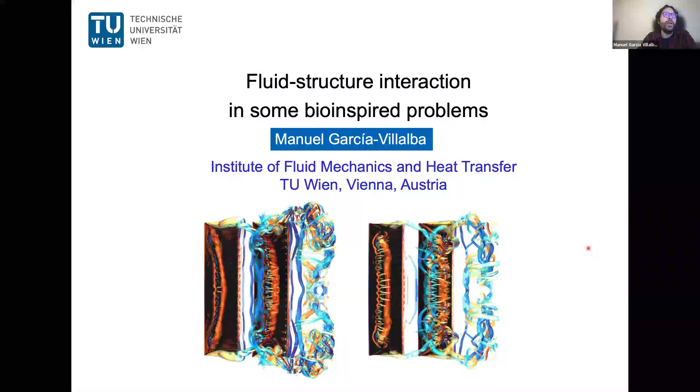The work was supervised by me and also by Oscar Flores, who is a professor of aerospace engineering there. We were lucky to have a group of very talented people who are now conquering the world everywhere. Our main in-house code was developed by Manuel Moriche, who is now a postdoc in my group, and by Alejandro Gonzalo, who is now a postdoc at the University of Washington in Seattle. The work I'm going to present today was mainly done by Gonzalo Arranz, who is now a postdoctoral researcher at MIT, and by Cayetano Martinez Muriel, who very recently joined the team of Airbus in Germany. As I said, this was a very good team, and they did very nice work. If you like it, the responsibility is of Cayetano and of Gonzalo.

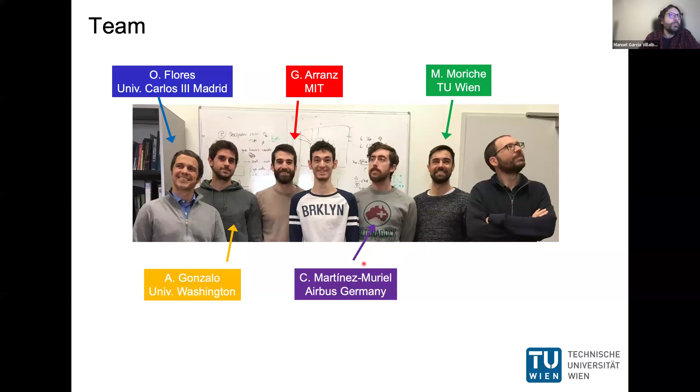This is the outline of my talk. I will first discuss a little bit about the motivation of our work, followed by some slides in which I will discuss the numerical methods that we employ in our in-house code. In particular, I will discuss the immersed boundary methodology that we use and the multi-body approach.

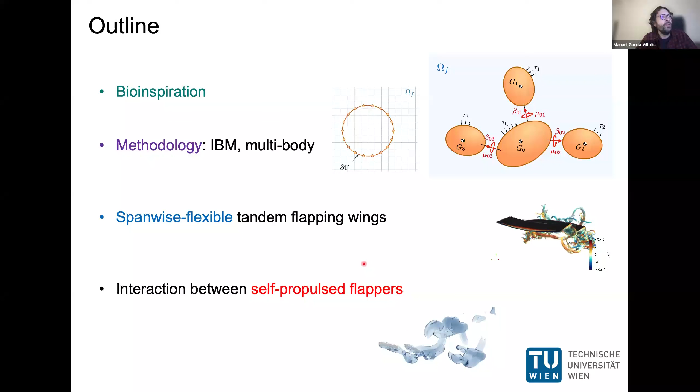This will be followed by the two topics that I have selected for today. As you can see in the images, I will discuss flapping wings in tandem configuration, where the main ingredient we want to study is the fact that the wings are flexible along the span. This will be followed by the hydrodynamic interaction between self-propelled flappers.

The motivation of our work is bio-inspiration. It goes without saying that insects, fish, or birds fly and swim professionally. They are very efficient and perform very impressive maneuvers. But even simpler systems in nature are also worth studying. For example, we have studied in the past Samara seeds that disperse using auto-rotation mechanisms. One can also look at the hovering of hummingbirds or at the complex patterns of swimming that fish perform when swimming in schools.

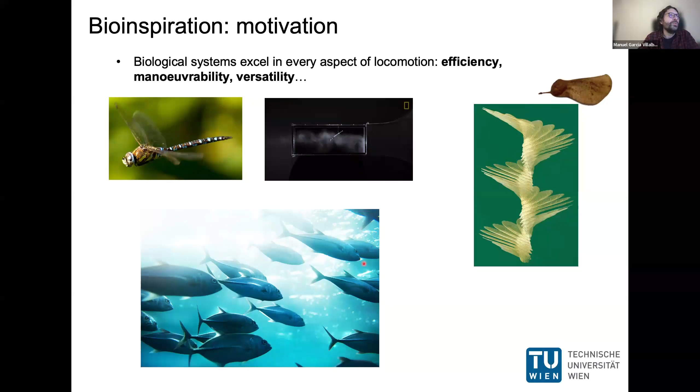This is why engineers are trying to mimic their capabilities, and there are many recent devices being developed all over the world, taking inspiration from nature. I have taken here some of these recent devices, for example the Delfly from TU Delft, or the Hummingbird from a company called AeroVironment, or the RoboBee at Harvard. I could have taken many others. There are many such devices under development, but in my opinion, at the moment they are following the path that engineering took in history in many cases, where they try to fly first and the theory comes later. So there are still many processes which are not very well understood, and this is why these devices are still rather clumsy, and they tend to work well only at their design point. But as soon as you go off-design, the performance is very limited.

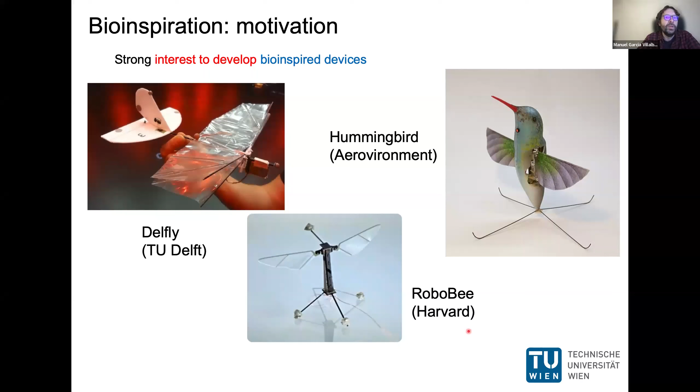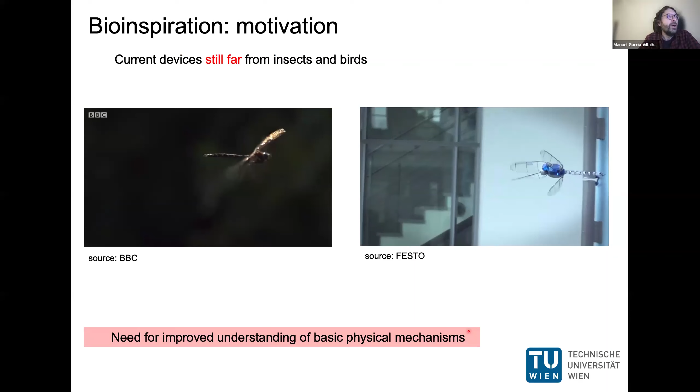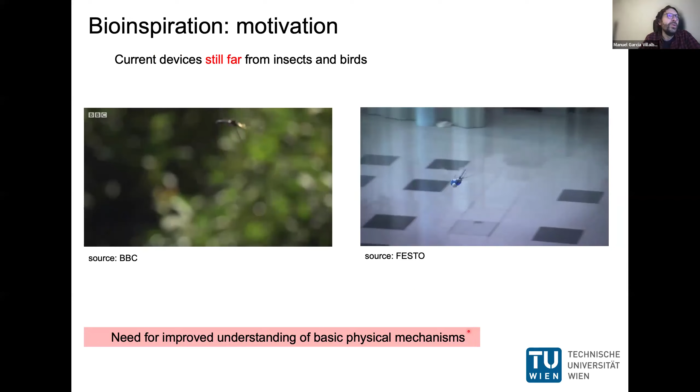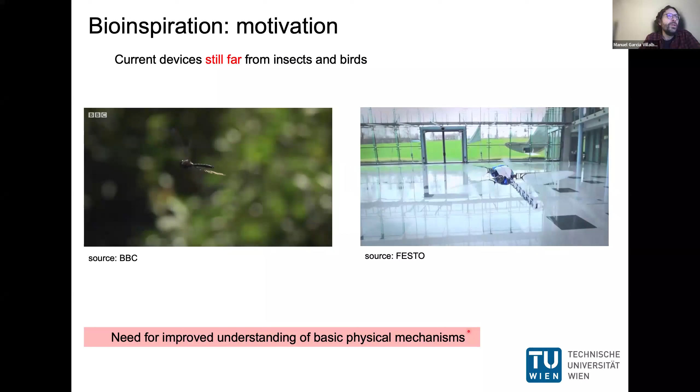I found a couple of videos showing a direct comparison between a dragonfly and a robotic counterpart, which I just found on the net. You can see how effortless and graceful the dragonfly is, while the robotic counterpart is not at all that graceful, and it looks like it's rowing in the air more than flying. So the flight is still not as beautiful as the flight of the dragonfly. In my opinion, there is a need for an improved understanding of basic physical mechanisms, and that's what we try to do in our group. We try to isolate phenomena to see where we can get some improved understanding of the physics.

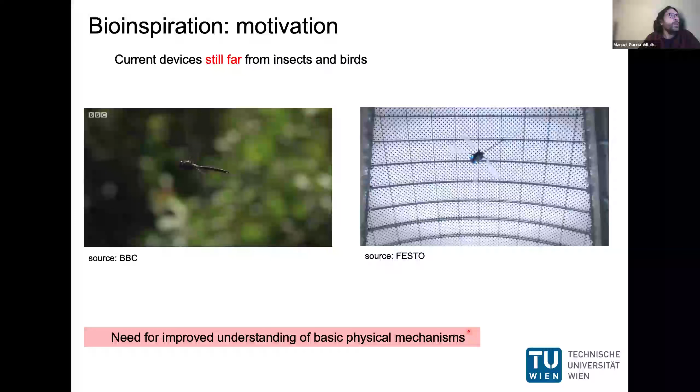Let me tell you about the challenges to improve these devices. First, the problem is that all these bioinspired problems are highly complex and very nonlinear, involving fluid-structure interaction with strong coupling between the hydrodynamics and the dynamics of the vehicle.

The vehicles are usually geometrically very complex. They can have structures that move relative to each other, so we need to consider relative motion among them, and the structures might be flexible and subject to large deformations, so we have coupled problems involving aerodynamics, dynamics, and flexibility.

On top of that, the real problem is that the parametric space is huge. Even for very simple problems, there are lots of parameters involved. For example, a couple of airfoils have the Reynolds number, the reduced frequency, the amplitude of motion, the distance between the airfoils, and one could continue. So often what we learn in one problem is not directly applicable to another.

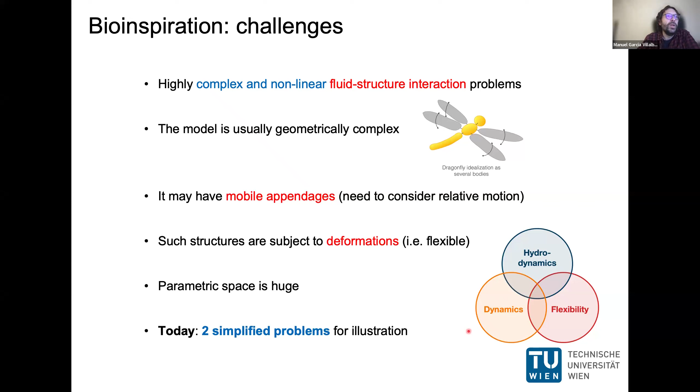Today I have selected two of the works that we have been doing in our group, and I hope that you get an illustration of the kind of things that we can do nowadays.

Before that, let me discuss a little bit about our in-house code, called TUCAN. In TUCAN, we solve the Navier-Stokes equations of incompressible flow using a well-established methodology, employing a staggered mesh with a fractional step method. The space discretization is based on second-order finite differences, and for the temporal scheme we use a semi-implicit low storage Runge-Kutta scheme.

We have tested our code on many machines and shown that it scales well. Very recently, we have also ported the code to GPUs, so we can handle all these problems.

The code can cope with bodies of arbitrary shape in motion, modeled using the immersed boundary method, in particular the one proposed by Uhlmann in 2005. We have an Eulerian mesh where we solve for the fluid, and a Lagrangian mesh for the objects, with the coupling done via a forcing term in the Navier-Stokes equations, such that we fulfill the boundary condition on the surface of the object.

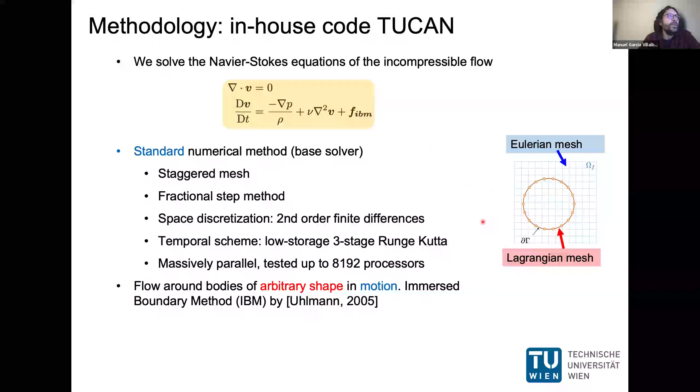As for the motion of the objects, there are several possibilities in our code. One is that we prescribe the motion, which we have used in many applications. For example, in our work on cardiovascular flows, that's what we do to solve the flow in the atrium, imposing the motion of the atrium walls obtained from medical images.

Or the motion can be the result of dynamic equations of motion. We actually have two versions of the code: one solves for a single body, and more interesting for today's talk, we have a version that solves the dynamics of a multi-body system of rigid bodies, which we call TUCAN Multi-body.

In this method, we use libraries from the literature based on robotic algorithms using generalized coordinates. This leads to a system of ordinary differential equations involving a generalized inertia matrix and terms that account for the relative motion between the objects. Then we have generalized forces: the aerodynamic forces enter via one term, and the forces due to the links between the objects enter via another.

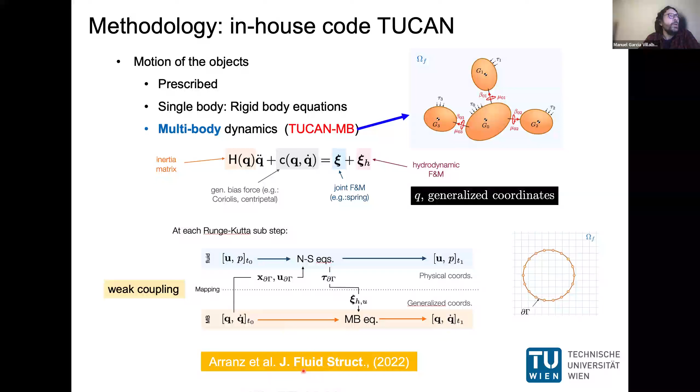The two examples I'm going to discuss today are based on flexible structures. In some situations, it is possible to model a flexible body using a combination of rigid bodies. I found this very nice example by chance on YouTube when I was looking for these kinds of videos, and I like it because it illustrates well the approach we are taking: to model a wing or flapper that is flexible, we split the wing into a number of rigid segments.

These segments we connect using torsional springs. If you think about the continuum beam or continuum wing, the flexible characteristics would be given by the Young's modulus, the inertia tensor, and so on. In the discrete system, this is given by the stiffness of the torsional springs.

To connect these two approaches, we tune the stiffness of the springs so that we have the same natural frequency of the discrete system as the natural frequencies of the beam. When you have that, you could expect the dynamics of your discrete system to be very similar to the dynamics of the continuum system.

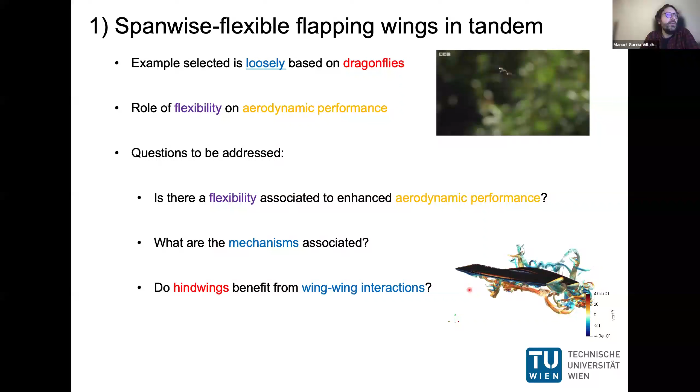Here, a bit more detail about the problem setup. As I said, we are going to consider two wings made of several segments connected by torsional springs, flying in forward flight, with a given flight speed. We are going to consider wings of aspect ratio 2 and 4.

We are also going to look at wings of various flexibilities, varying from very flexible to rigid wings. For a rigid wing, the ratio between the natural frequency of the structure and the imposed frequency would go to infinity. With decreasing this parameter, we have increasing flexibility. This is the main parameter that we are going to change.

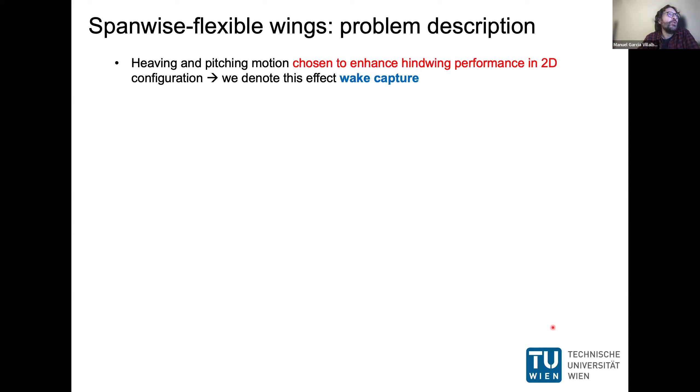Now, when you look at the tandem system, what you observe is that the flow around the forward wing is very, very similar to the flow of the isolated wing, while the flow over the hindwing, of course, is influenced by the wake of the forewing. So what you see is that

the hindwing is navigating the wake of the forewing in such a way that the leading edge vortex formed in the hindwing interacts with the leading edge vortex shed by the forewing, and they form a dipole. This dipole moves horizontally in the wake, forming a symmetric wake in contrast to the wake obtained for the isolated case, which was asymmetric.

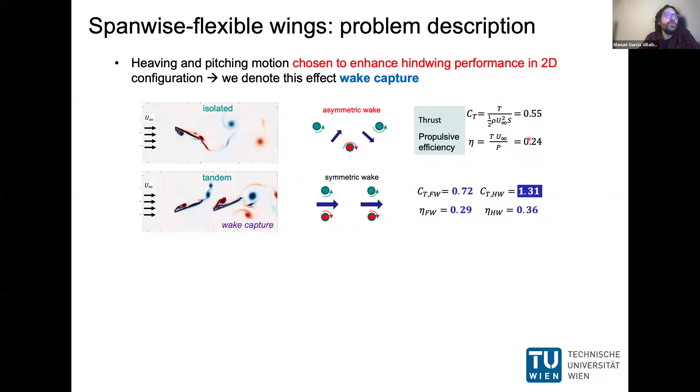So if you want, this is sort of the design of the simulation. We design the motion to observe this effect in the hindwing. Now this is the starting point, and we want to see how this performance is affected by 3-dimensional effects and also by the flexibility of the wing.

In order to do that, I need to discuss first the case of the isolated wing to be able to understand what's going on, and then later on I will consider the case of the tandem wings.

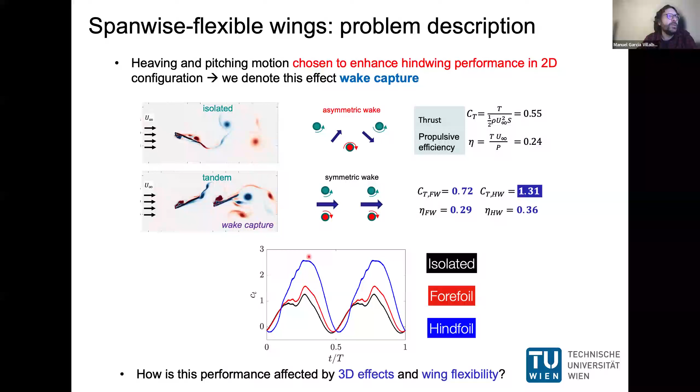If we look at the aerodynamic performance of the isolated wing, here you are seeing first, in this plot, the thrust as a function of time. In this plot, I'm going to show you the mean thrust, the time average of this signal, as a function of flexibility, where the rigid wings will be on the right. With decreasing frequency ratio, we are increasing the flexibility of the wing. Then I will show you some visualizations on the lower part.

In particular, here you have a visualization of the rigid case, in which you see that this is an instant in which a leading edge vortex has already developed, during the downstroke. But we also see that now, since we have 3-dimensional effects, we have vortical structures forming at the tips, and these 3-dimensional effects result in a reduction of the thrust coefficient compared to the value we had for the 2D configuration. In the 2D configuration, the value was about 0.55, and in the 3D case, for aspect ratio 4, we have a somewhat lower value.

Now if we add the cases with increasing flexibility, we see that with increasing flexibility, the peak force is increased but also delayed, happening at later times during the cycle. So when you look at the mean thrust, it increases with increasing flexibility up to what we call the frequency which is very close to resonance, since this ratio is 1 here. We call this case the optimal case, because as we will see, this is where we get the maximum thrust. When you go beyond, this would be the corresponding visualization for this case.

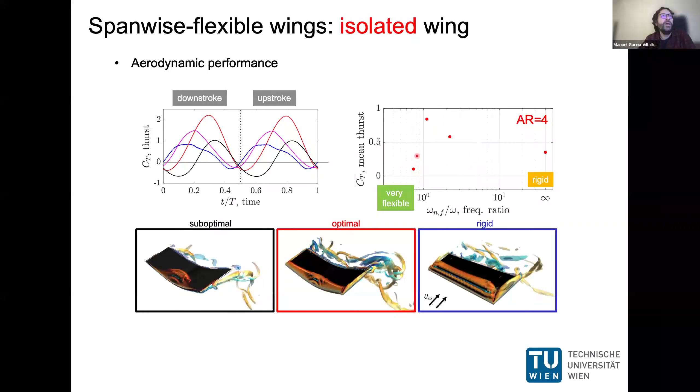It is good to see. This is just an instant. Let me show you an animation so that you can see how the vortex develops on top of the wing.

It is not very clear, but what happens if you compare the rigid wing and the optimal wing is that the leading edge vortex develops somewhat later and remains longer attached to the wing, and this explains the peak in performance here compared to the blue curve.

So this optimal case would be this red line here, and the rigid case would be this case here. And in contrast, you see that whenever you go beyond resonance, that would be this point here, there is barely any leading edge vortex forming at all.

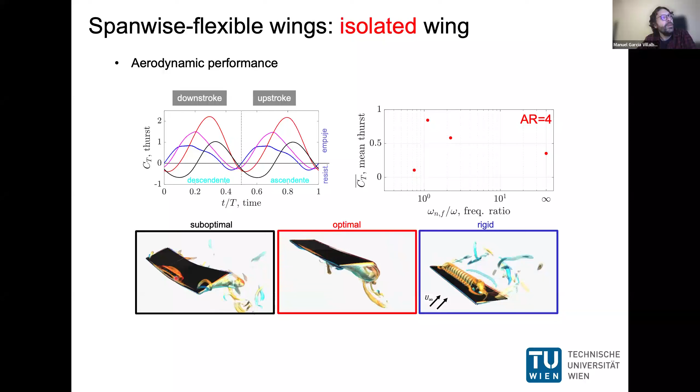But also you see that it seems that the motion of the midsection and the motion of the tip is out of phase. And this is one of the main issues why the aerodynamic performance is so bad for this case.

If we add now here the data for the aspect ratio 2, we see that the data fits very well together with the data for aspect ratio 4, and that the trend that with increasing flexibility, the performance is enhanced until we reach the resonance frequency, and from there the performance decreases, is very clear.

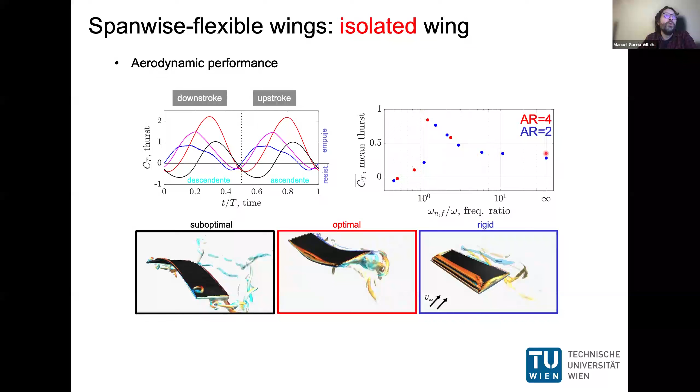And also you see very clearly, if you look at the rigid wings, that we get a little bit more force for aspect ratio 4 than for aspect ratio 2 for the rigid wings. And this is, of course, due to the fact that the wing tip effects for the smaller aspect ratio are more important.

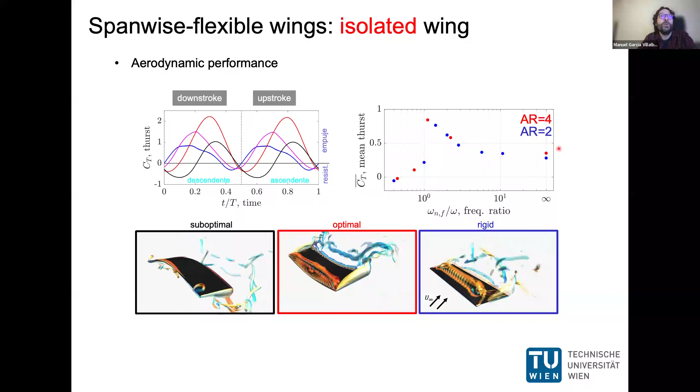So as a summary of this slide, we can say that the enhanced performance seems to be linked to a fluid structure resonance, and that the development of the leading edge vortex on the wing is highly influenced by the flexibility of the wing.

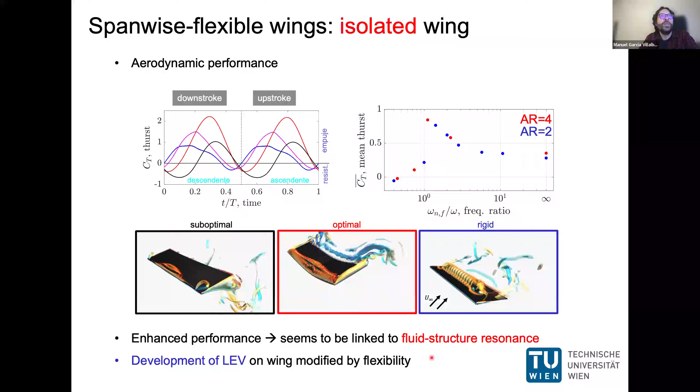It's also interesting to look not only at the aerodynamic performance, but also at the structural response to understand a little bit better what's going on.

And what you have here on the left is the deflection of the midline of the wing, so the point with respect to which we perform the pitching. And the cases are the rigid is in blue, the optimal case is in red, and the very flexible case is in black.

You see how for the optimal case, when the wing is moving up, indeed the tip is also moving up, while this is not what happens for the very flexible case, which, as we already sort of showed before, are out of phase.

So when you plot here in this image the values for the tip displacement compared to the amplitude of heave motion, we see that, of course, for rigid wings, nothing happens because the wings are rigid, they don't deform. But with increasing flexibility, we again get a peak which happens at the resonant frequency, and beyond there, this value decreases. And this reinforces the idea that the enhanced performance is related to a resonant phenomenon.

Now, I find it very useful to look at the envelope of these lines. And when you do that, here I'm plotting the envelope of these lines just from the midline here to the tip. And here again, this is the midline and this is the tip.

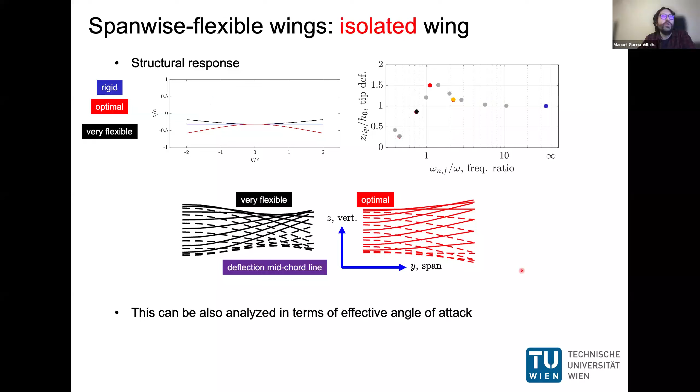The timing of the events is very important. At resonance, the tip displacement increases the effective angle of attack, but keeping synchrony with the wing pitching, and this synchrony leads to increased thrust. Beyond resonance, the synchrony is lost and performance drops dramatically. So for the isolated case, the enhanced aerodynamic performance can be seen as a combination of fluid-structure resonance and aerodynamic tailoring, such that the aerodynamic response is optimal.

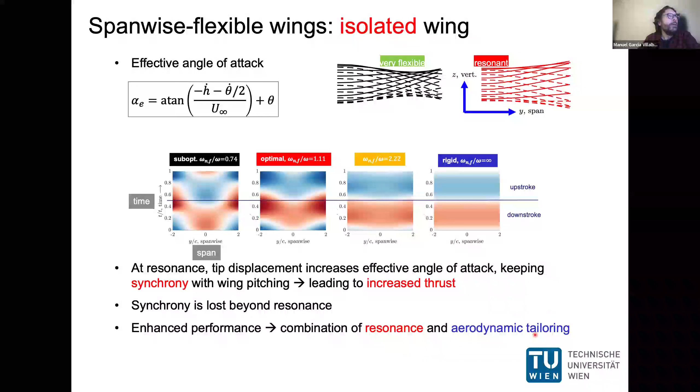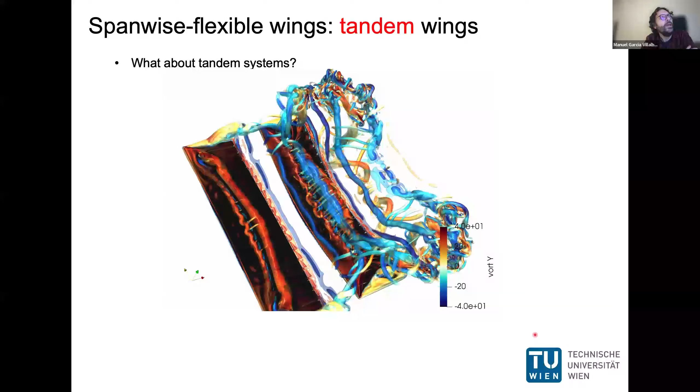Now you may ask, what happens with the tandem wings? Are these effects still the same? Let me start by showing you a visualization of the flow. This is the case with optimal, resonant flexibility.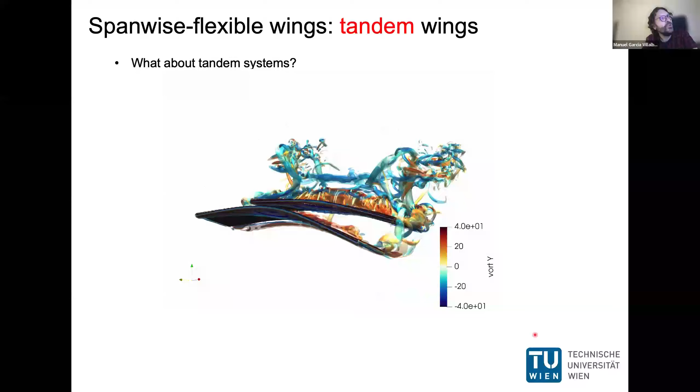You see how we developed the leading edge vortex in both airfoils, in both wings, and how the interactions in the hind wing are far more complicated than the flow structures in the forewing. You can also see the wingtip effects.

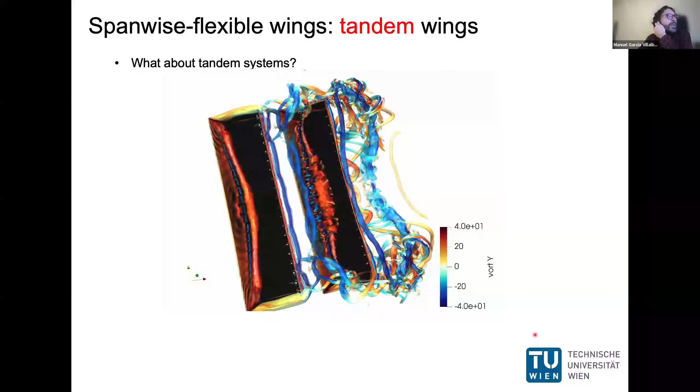We can try to relate this, at least qualitatively, to what happened in the 2D configuration. If you recall the two-dimensional movie, we saw the leading edge vortex, and then the interaction between the leading edge vortex of one wing and the other, finally forming a dipole. You can actually see these things here too.

If you look here, this would be the leading edge vortex, these are the two vortices that are interacting, and finally this is the dipole that is in the wake. But when you go towards the tips, the interactions are much more complicated. You develop tip vortices that interact with the other vortices, leading to very complex vortical interactions in the wake.

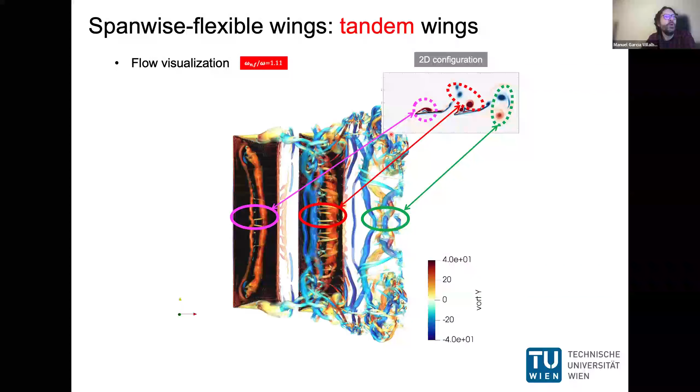Now looking at all the cases, here's a visualization from the top, with rigid wings on the right and increasing flexibility towards the left. We observe that in the forewing, in all cases, we have a very clean leading edge vortex, except for the case of a very flexible wing.

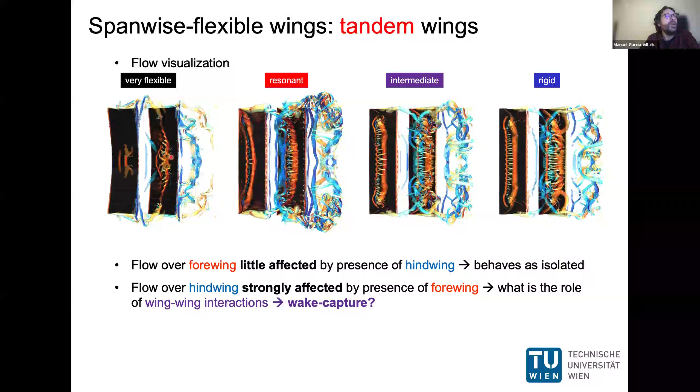The forewing is very little affected by the presence of the hind wing. As we will see, the forewing behaves as if the wing were isolated, but the hind wing is strongly affected by the presence of the forewing. So we want to see how much this effect matters, and what the role of what we call the wake capture is.

Here in this plot I'm showing the aerodynamic performance, again the mean thrust coefficient as a function of flexibility, with rigid wings on the right going to very flexible on the left. Closed symbols show values for aspect ratio 4, and open symbols for aspect ratio 2. The gray symbols are the isolated wing, the red symbols are the forewing, and the blue symbols are the hind wing.

First, if we compare the forewing and the isolated wing, we see that the trends are very similar, as expected. The values for the forewing are somewhat above the values of the isolated case, but this effect was already observed in the 2D configuration, so it's not related to flexibility—it already occurs in 2D. Remember, we designed the case so that performance should be enhanced for the hind wing, so it's more interesting to look at the data for the hind wing.

In order to do that, you need to compare the blue symbols and the red symbols. If you look at these two cases, the wake capture phenomenon is very clear. For rigid wings, we see this wake capture, getting more thrust for the hindwing than for the forewing, and this effect is still visible for intermediate flexibilities. However, this effect is lost for the resonant wings and for the very flexible wings.

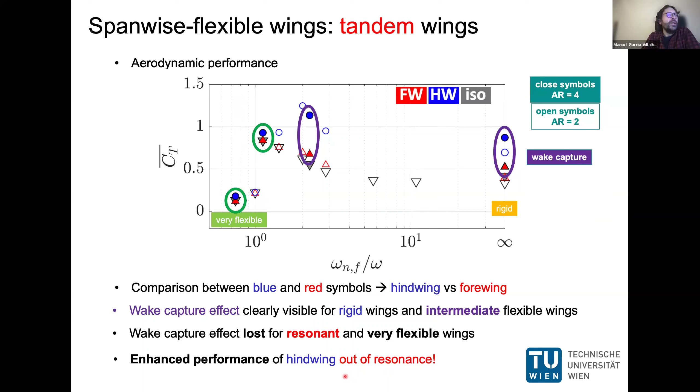This is also visible if we look at the structural response, as we saw before. Here I'm showing the deflection patterns in the mid chord - on top are the values for the forewing, on the bottom for the hindwing. For the forewing, we observe the same phenomenon as before, where the resonant wing has tips with enhanced amplitude. But for the resonant wing in the hindwing, this doesn't happen anymore. It's actually more aerodynamically beneficial to have structural deformation like the intermediate case, so the interplay between wake capture and structural deformation is not optimal for the resonant case.

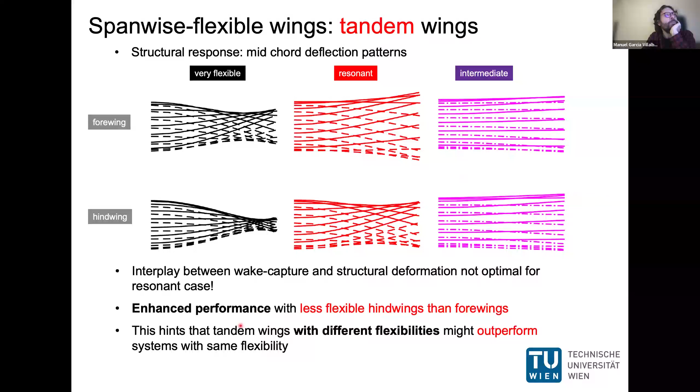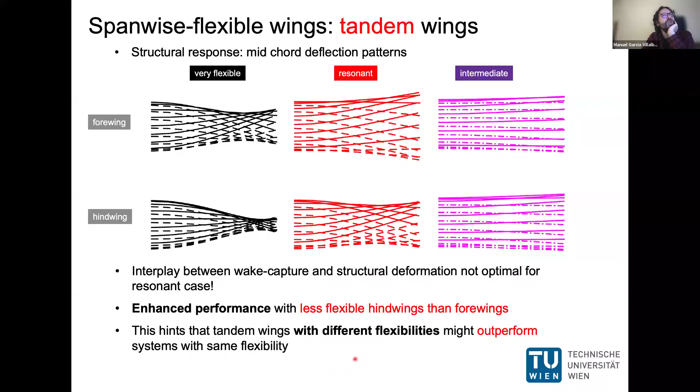So it happens that we obtain enhanced performance with less flexible hindwings than forewings. This observation gave us the idea that it might be possible to design tandem systems with different flexibilities, and that these tandem systems might outperform systems with the same flexibility. To test this hypothesis, we ran a new set of simulations - nine simulations with aspect ratio 2, covering all combinations of frequencies from rigid, intermediate, and resonant flexibility.

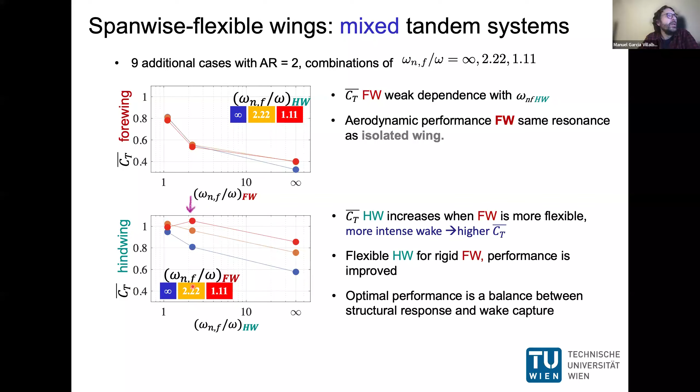So in summary of this part of the lecture, I've shown that there is indeed an optimum flexibility associated with enhanced aerodynamic performance. For isolated wings, this enhanced performance is a combination of resonance and what we call aerodynamic tailoring. But for the hindwings of tandem systems, enhanced performance does not occur at resonance - there's a balance between aerodynamic tailoring and wake capture. In other words, the timing of events is extremely important.

This has led us to a new hypothesis that it might be beneficial for tandem systems to have different flexibilities. You can find much more information about this in these two publications - one is already published, the other is currently in review.

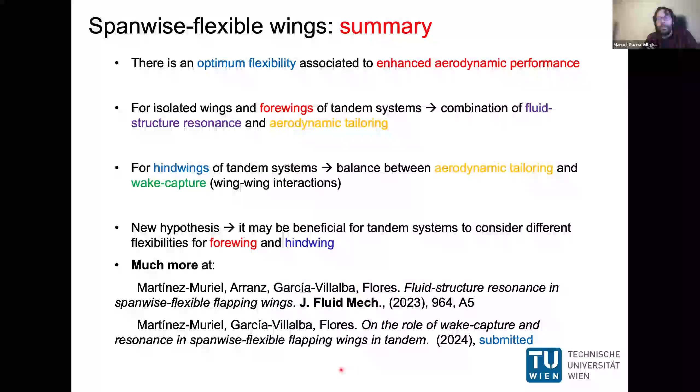I want to spend the last 10 minutes of the lecture talking about the second problem: the self-propulsion of flexible flappers. This example is loosely based on fish schooling.

Here I'm going to consider only two flappers swimming in tandem. The flappers are modeled very similarly to the span-wise flexible wings we just discussed, but now the flexibility is along the chord.

What we do is impose the motion of the leading edge. Because we impose the vertical motion of the leading edge, the rest of the flapper moves passively, generating thrust, and the flapper starts moving until it reaches steady state velocity.

When you have more than one flapper swimming freely in the horizontal direction, they might adjust their relative position as a result of hydrodynamic interactions. The question we wanted to address is whether there are stable configurations, and if so, whether these configurations result in energy savings for the flapper flapping behind.

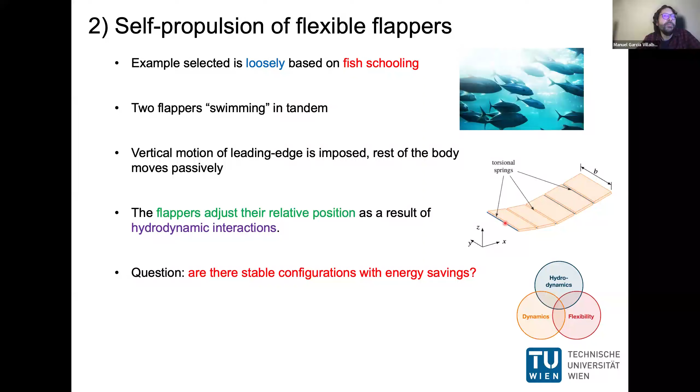We are not the first to look at these problems. There are some 2D studies, first done by Ramananarivo, who studied airfoils free to move horizontally and observed that the follower stabilized at quantized positions—so there was indeed an equilibrium position. Later studies showed that the follower is able to save some energy, which Ramananarivo hadn't addressed.

When you look at a 2D configuration like the one studied by Ramananarivo, the wake of the oscillating airfoil is very long, formed of alternating vortices which diffuse very slowly because there is no vortex stretching mechanism.

For three-dimensional bodies, in particular the slender plates we consider, the wake is rather different. It's formed by oscillating vortex rings that shed alternately top and bottom, moving in an oblique direction and diffusing much more quickly than the wake in 2D. So we wondered whether stable solutions would also be possible for such configurations.

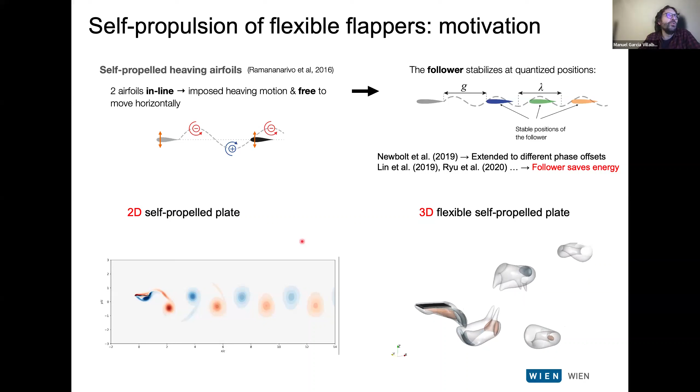Here are a few more details about the case we are studying. We have two flappers moving in tandem. We impose the motion of the leading edge of the flappers with sinusoidal laws of the same amplitude, considering both a vertical offset h and a phase lag between the motion of the follower with respect to the leader.

We let them evolve freely in the horizontal direction, and the quantity D is actually a result of the calculation. In the study we do a parametric study considering several offsets and several values of the phase lag, while other parameters are fixed—the parametric space is huge.

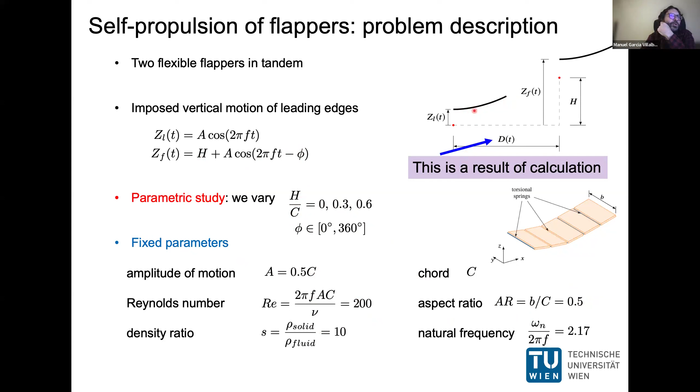For example, the aspect ratio of the flapper is 0.5. All these parameters have been selected so that the propulsive performance of the isolated flapper is reasonable, giving a reasonable swimming speed.

Let me jump into the results. We do find stable configurations, and we have found two kinds. One we denote compact: the follower is released at some distance from the leader, but approaches and settles just behind it, so that they form sort of a broken airfoil.

There are also configurations we call regular, in which after an initial transient the follower settles at some distance from the leader. In both cases, the propulsive speed we get is very similar to that of the single flapper—we only observe variations of about 3%.

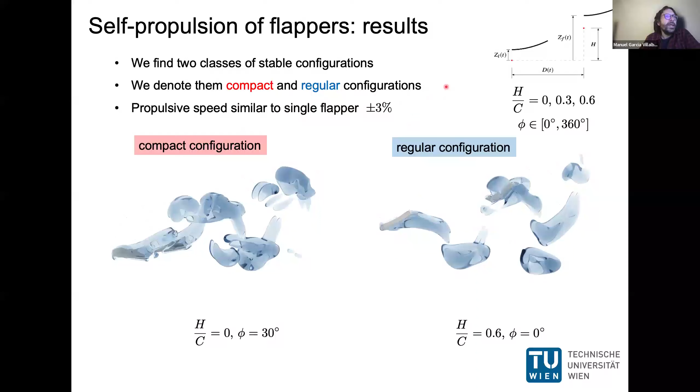So what about the equilibrium distance? When we plot it as a function of the phase lag, including all values for all offsets considered, we observe that the data falls along a line, independent of the vertical offset. So it seems the equilibrium distance only depends on the phase lag, not on the vertical offset.

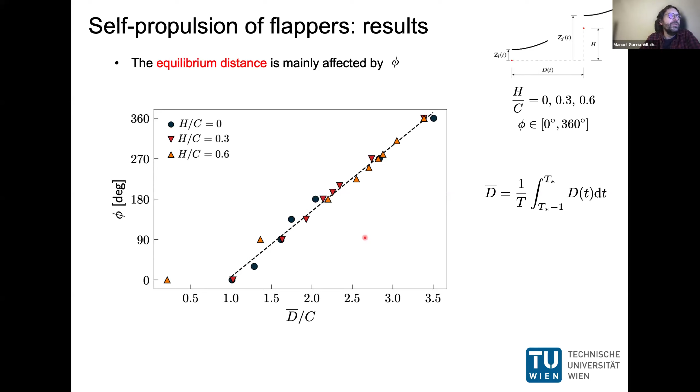Interestingly, in 2D, something similar happens. The equilibrium distance also varies linearly with the phase lag, but the slope of this line is slightly different, and this is a fact for which we don't have a clean explanation why this happens. So this deserves further investigation.

Now, what about energy savings? Do we save energy by the follower or by the leader? In order to answer that, we look at the power requirements.

We plot the power needed to move these flappers, computed as the product between the force on the leading edge and the velocity of the leading edge. We take the maximum of this quantity and zero, since we assume we cannot extract power from the fluid, so the actuator moving the flapper cannot use this energy when the number is negative. We then compare this power to the power required to move the single flapper, so that when the power ratio is bigger than 1, we need more energy, and when it's smaller than 1, we are saving energy.

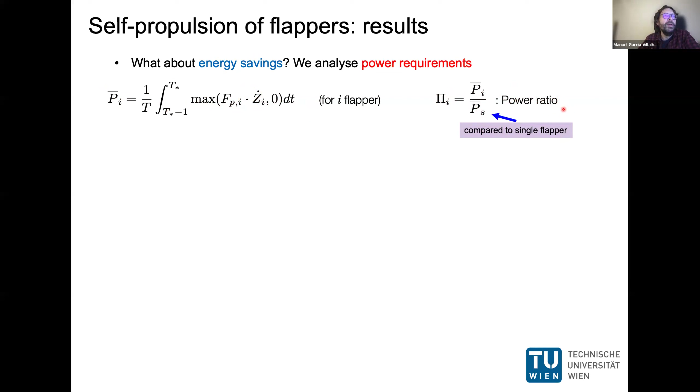When the equilibrium distance is close to 1, that means we are in a compact configuration. In the compact configuration, we observe that we always have more values higher than 1, meaning that compact configurations are not efficient.

We see a number of configurations with strong energy savings, and the energy savings depend on the vertical offset. We find that in order to save energy with increasing vertical offset, the equilibrium distance then needs to be larger, so you see this sort of trend here.

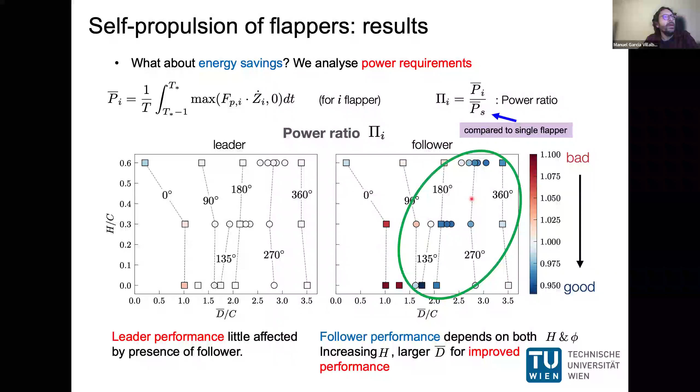This particular case is the optimum case among all the ones we've tried, the one with the best performance. In any case, we see that the difference between being less efficient or more efficient happens during the second half of each stroke. We can try to see if, by visually looking at the flow, we are able to understand how this happens.

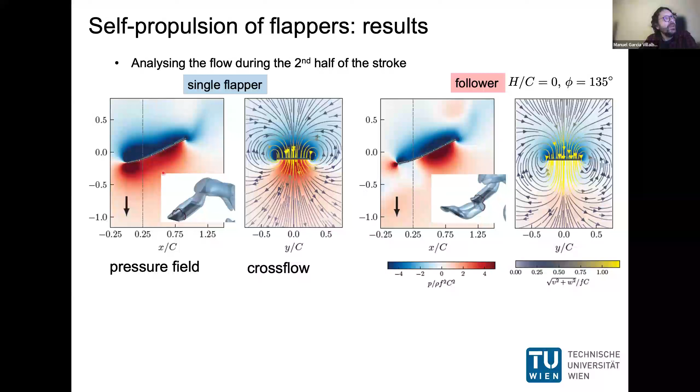So if you look at the vertical jet of velocity in this particular section, you see that it's much stronger in the case of the follower, and that leads to a reduced pressure on the lower surface of the follower compared to the pressure in the single case. This constructive interaction is what explains the lower power requirement in this example.

So again, as we saw in the case of the spanwise flexible flapping wings, we see that the timing of the events is extremely important in order to enhance the performance.

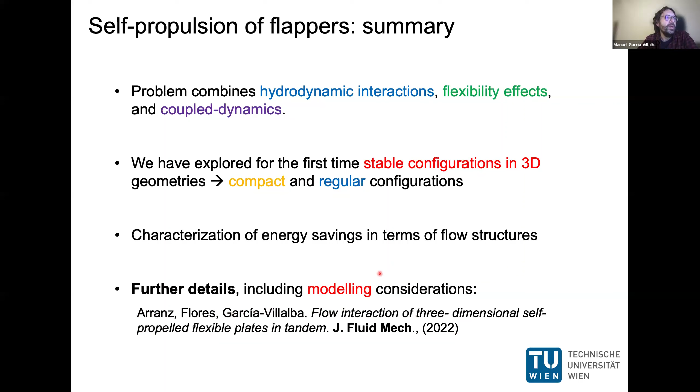With this, I finished this part of the presentation, and also the presentation overall. I have shown you a problem that combines hydrodynamic interaction, flexibility effects, and coupled dynamics. We have explored stable configurations in 3D, and shown that for some cases we do have energy savings. You can find much more information in this paper, including some modeling considerations. And with this, I thank you for your attention.

Thank you very much, Manolo, for the very interesting talk after the two examples you showed.

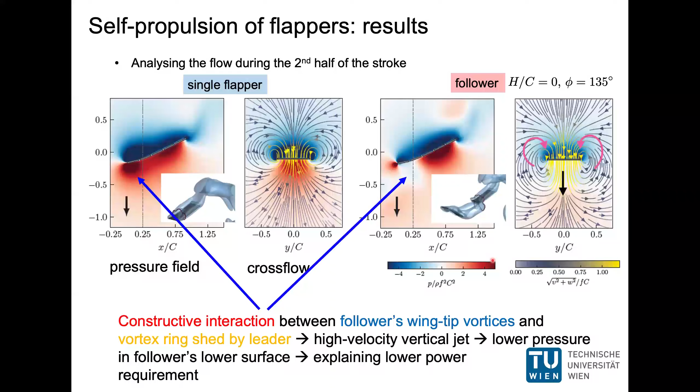Then maybe I can start with a question on your last case, but it applies to the previous one too. How robust do you think these optima are with respect to perturbed flow conditions in which the real fish or the real dragonfly is supposed to swim?

Well, I don't know exactly how to answer this. We are doing some studies in which we look at oscillating airfoils with incoming turbulence, and what we see is that the aerodynamic forces are not strongly influenced by the strong motions that we are having. Now, of course, one could argue whether the turbulence we are using is realistic, because the environments in which fish or dragonflies move are not uniform at all.

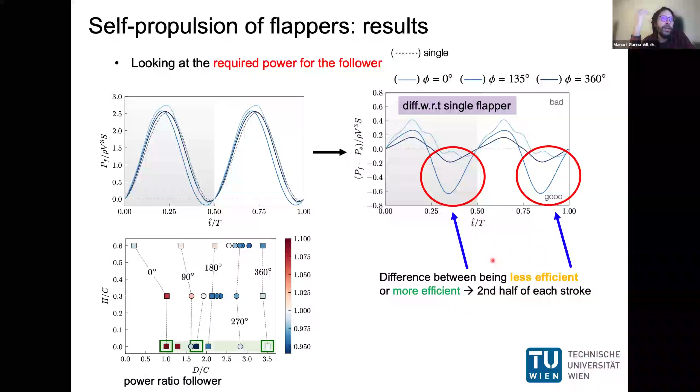So I would not say that the results are directly relevant to that condition, but what we are trying to do is understand phenomena that lead us to new ideas. For example, in the case of the spanwise flexible wings, by analyzing the results we were able to come up with a new hypothesis. Now it remains to be seen whether, in practical problems, having a more rigid hindwing actually gives better performance. But at least we have developed a new idea.

Sure, definitely. I mean, regardless of the direct application, that's definitely a new regime which you uncovered. So that's out of doubt.

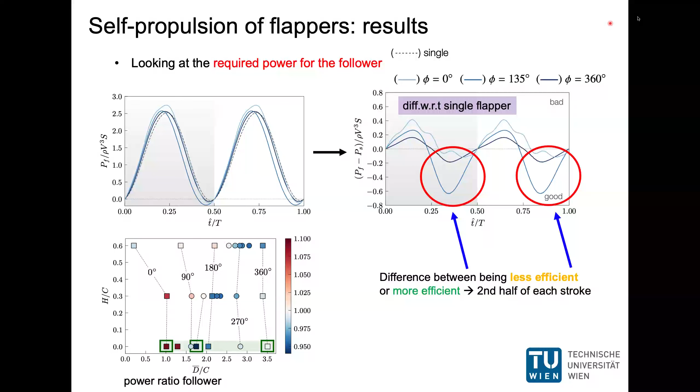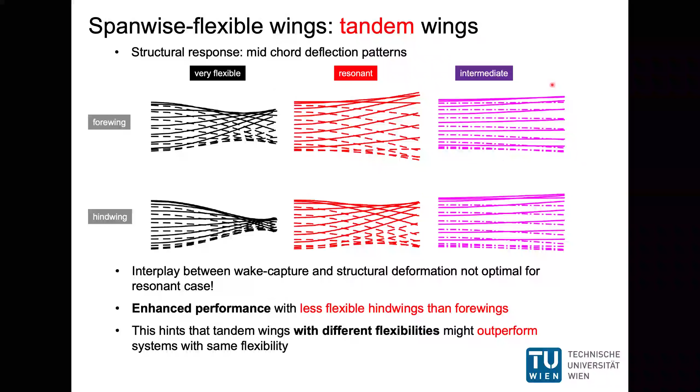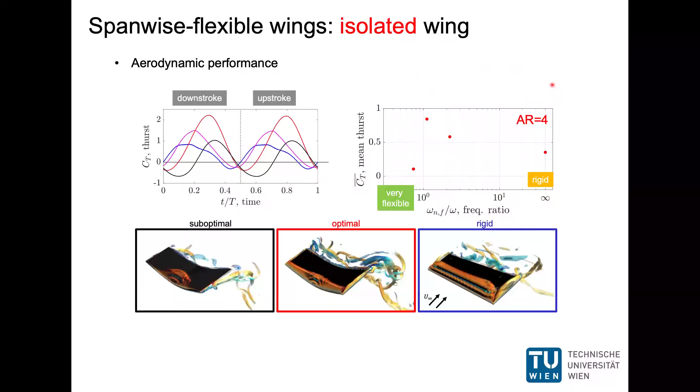Then I have another question, if I can. In the case of the two wings you presented before, I just want to ask something, because I'm not sure I managed to understand correctly the modeling which is implemented. So you actually deform them by torsion, but not by torsional springs, yes?

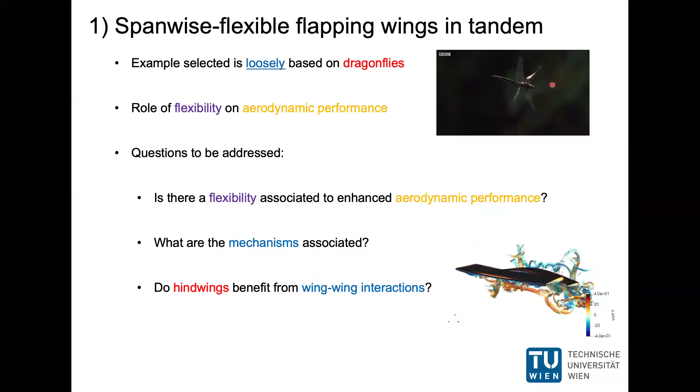But you don't include flexion moments, or do they just deform basically on a plane, right? Or along an elastic line. So this flapper is only flexible along the span, indeed. These two plates can only rotate with respect to each other, and that's it.

Okay, so even in this case, with just one degree of freedom more than the stiff flaps, you manage to get quite a different regime. Okay, interesting. Yeah, that's very interesting.